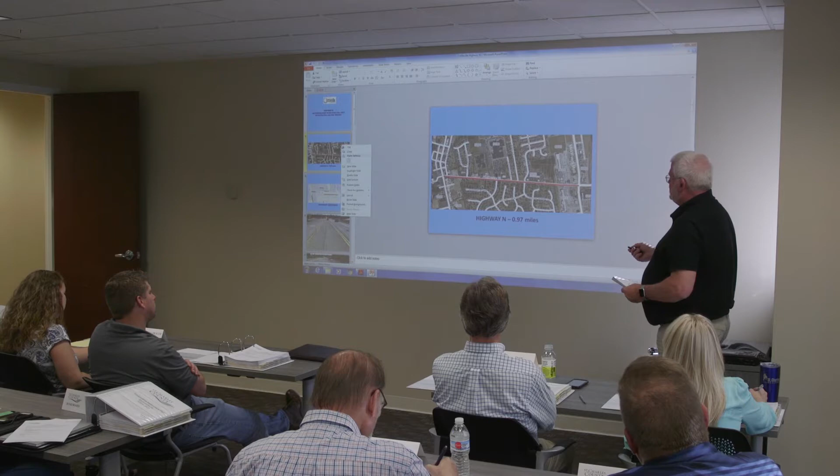Counts for the traffic on that road, 2018 is 14,000 cars roughly. 2038 is projected to be almost 21,000 cars. There's a lot of activity, obviously, with the school being here. Over here at St. Joe, this is a Catholic school, so there's a lot of foot traffic and vehicle traffic that goes up and down through this. It's a very busy stretch of roadway.

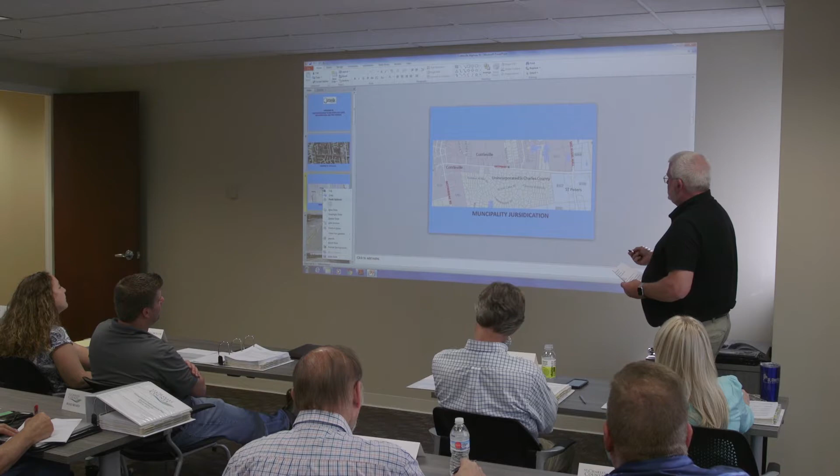You can see probably, I think there's 24 parcels altogether, and 16 of them are in the county. So about 2/3 of the project is on the county side. Small section here, this is the fire station and the cigar bar right here, so it's just a small section of Cottleville.

So most of the foot traffic is all walking up and down this side of the road to get to the school, to get to the businesses in that area.

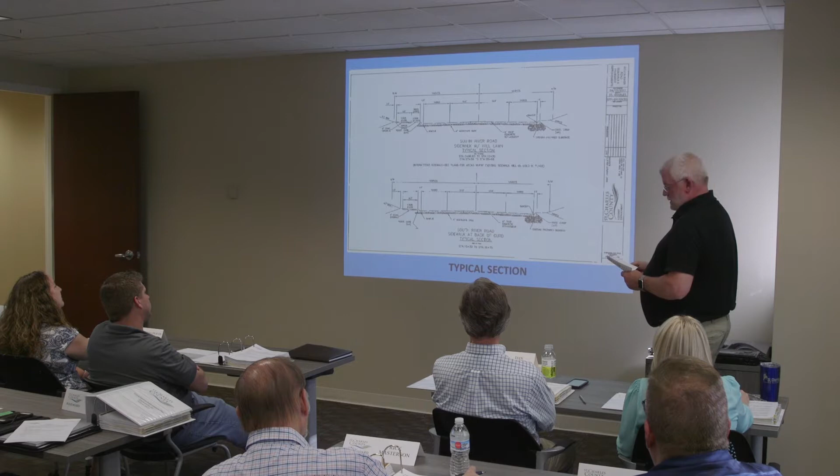Okay, funding wise, again, East-West Gateway approved this twice now. In 2013, they approved it for funding. They approved it for us in 2014 to do our side. Now they've approved it again in 2018 to do the overlay and the sidewalk on the other side. So they see the need, obviously, for this roadway to be more pedestrian safe.

Funding wise, the total project is estimated at 1.9 for this roadway and sidewalk improvements. East-West Gateway again approved 1.1 for the project. That leaves $760,000 as a balance. The proposal is, although this is 8% of the total, proposal...

The proposal is for Cottleville to end up covering 20% of it, which would be 152,000 of the 760,000, and then they're asking the road board to contribute 608,000. So it'd be a 20%, 80% match of the outstanding amount the road board did not cover.

Is that really a letter route? It is Highway N, years ago MoDOT gave it to Cottleville, so it maintained the name but it's under City of Cottleville per se. It actually runs that way all the way through Cottleville until you turn and go north past the BMOS, and then when you get to the bridge, it goes back to Highway N and State Control. So they maintain the name, but it's actually a city control route.

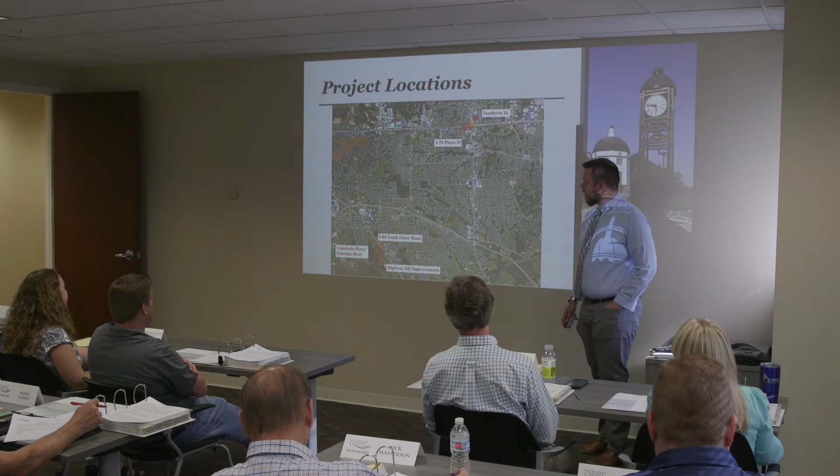Here you can see where the projects are located within the greater City of O'Fallon. Sonderen and I-70 Phase 2 are both near the I-70 and Highway K interchange, and the other 3 projects are located very close to the Highway DD, Winghaven Boulevard intersection with Interstate 64.

Before I get into the first 2 projects, a little bit about the Streets of Caledonia development we have planned. Basically it's going to be a 260-acre mixed-use development near the intersection of I-64 and Highway DD in Winghaven. It's going to be 100 acres of commercial, divided between retail and office use, so you can see examples of each. The other 160 will be devoted to mixed-use residential, looking at single-family homes, multifamily homes, and senior housing. Basically, commercial sites are going to be pad-ready and marketed for the listed purposes.

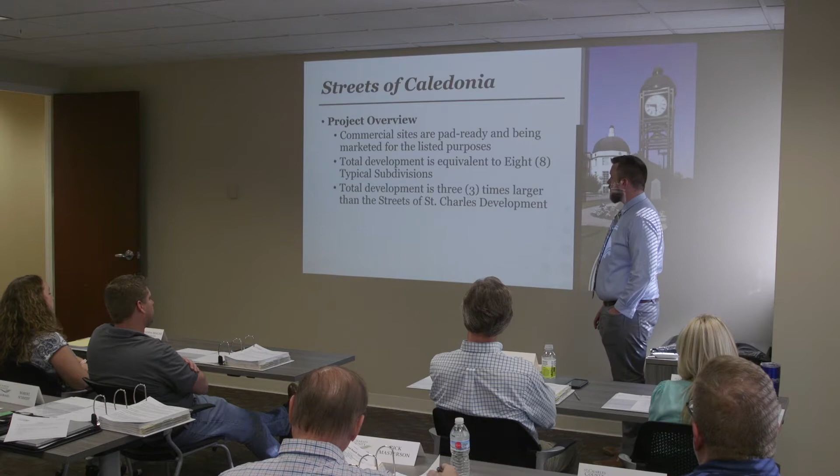The total development is equivalent to 8 typical subdivisions, and it's 3 times larger than the Streets of St. Charles development. So it's a fairly sizable development, obviously the largest we've had. So we'll get into it.

The first part is the Highway DD improvements. So you can see here, it's Highway DD basically from I-64 to just south of Caledonia Parkway. The existing conditions: DD is an arterial 2-lane highway, south of I-64. We need to do some improvements in order to facilitate moving traffic through the area for a multitude of things that are going on.

Here you can see the project scope. We want to add a traffic signal at the DD Caledonia Parkway intersection, adding a roundabout where DD and Dalriada Boulevard intersect, look at some right-in right-out side access for various parcels, provide through lanes on the eastbound approach to I-64, provide through lanes to the westbound approach on DD, and do the westbound right lane turn into a right-in right-out.

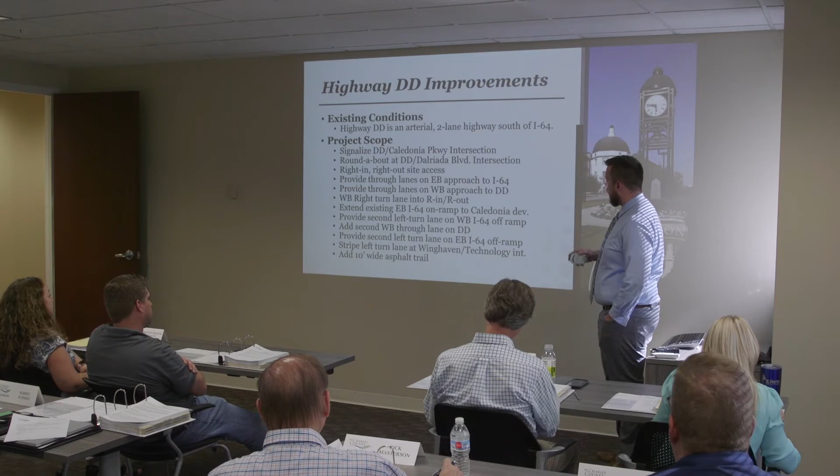Extend the eastbound I-64 on-ramp to Caledonia, provide a second left turn lane on westbound I-64, provide a second westbound through lane on DD, provide a second left-hand turn, provide a left turn into Winghaven, and provide a 10-foot asphalt trail. Basically, we're trying to improve the ability of traffic to move through the area with this large development, as there's a lot of things going on.

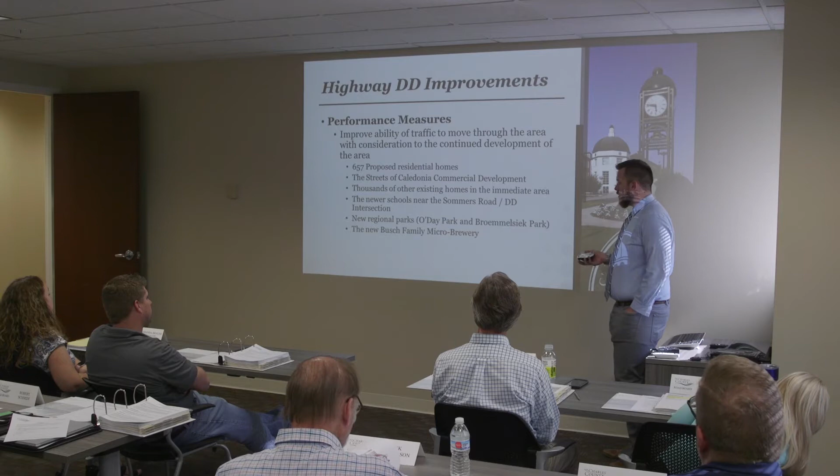We have 657 proposed homes, the new Streets of Caledonia commercial development, and a lot of other homes in the immediate area. That development is also ongoing. There are a lot of newer schools near the Sommers Road and DD intersection, 3 different schools that see a lot of traffic. There's also a lot of regional parks, O'Day and Broemmelsiek, and the new Busch Family Microbrewery going on down the road on Highway DD.

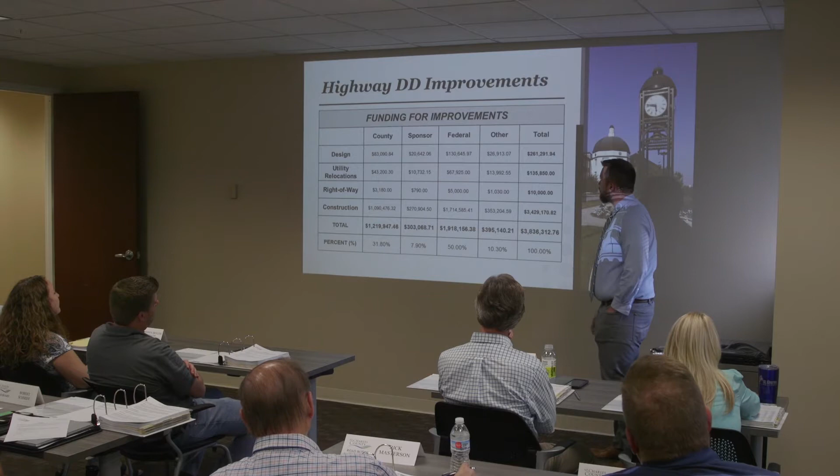Moving on to the next one. This concerns the actual 2 roads that would be built as part of the development, which are Caledonia Parkway and Dalriada Boulevard.

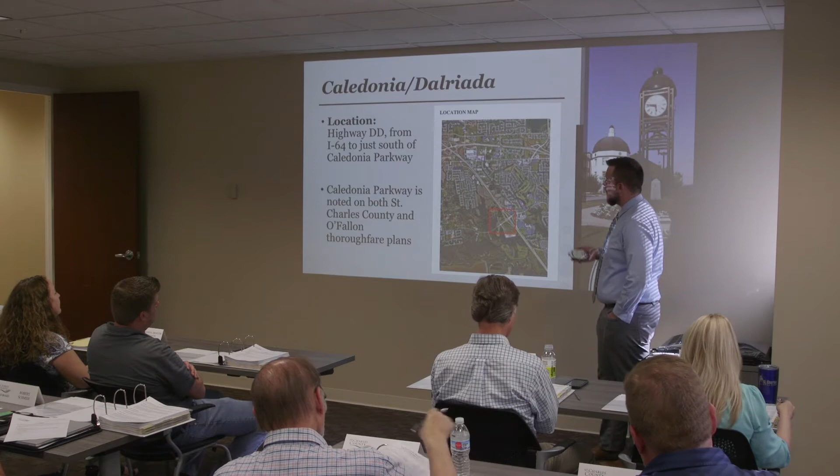Caledonia Parkway is noted on both the county and the O'Fallon thoroughfare plans. It's been planned for a while, it's my understanding. A portion of Caledonia already exists, it's already been built, but it dead ends. Dalriada does not yet exist. So the idea is to construct 2 roads: Caledonia Parkway, which would stretch between the I-64 South Outer Road and Highway DD. It's a 3-lane road with islands, and that transitions to 5 lanes once you start to approach Highway DD. This will be the main roadway through the commercial portion of the development.

The second roadway is Dalriada Boulevard, which connects between Caledonia and Highway DD. It's kind of a spur that comes off of Caledonia Parkway. It's only a 2-lane road, and that transitions to 3 lanes once you reach Long Haven Drive, another smaller roadway. It serves as a secondary roadway through the commercial development, but as the primary roadway through the residential development. The idea is, again, to help facilitate traffic movement through those streets. It also provides a continuous east-west connection between Highway N and Highway DD, which is fairly important because we don't have that many connector roads like that in O'Fallon.

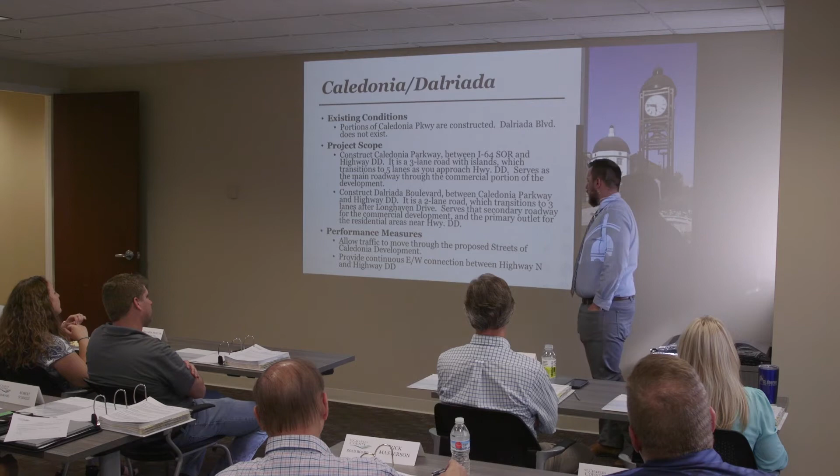So here you can see the gray highlighted area is Caledonia Parkway, and how that ties into I-64. This would be the outer road that would be developed, providing a continuous connection between that and Highway DD. Dalriada is slightly southwest of Caledonia, spurring off of that and providing connection. This would be a lot of your commercial development, and this would be much more of your residential development. So you can see how those 2 roads help facilitate movement through that. It would also extend over to Caledonia Drive to facilitate more of the residential development on that side.

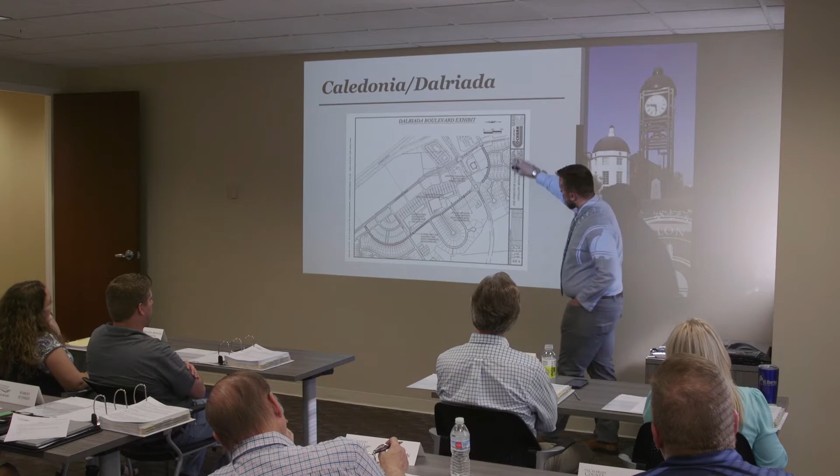Third project is the... I'm sorry, go ahead. Do we want to pause here? Yeah, I do. Okay, I was going to save questions for the end, but we'll go ahead.

Well, these two have come— Absolutely, no, go ahead. Amanda, on the first one, what do we think of that as an economic development?

Gonna drive to that area and that type of thing? So, the city's gonna kill me here.

We went back and forth on whether both of these were economic development applications. They both probably could be, but there was no quick timeline needed and no specific jobs coming. Economic development applications are usually associated with somebody coming to the region and bringing jobs, like Amazon or the North Point people, who were bringing a specific number of jobs. We knew what those wages were gonna be and exactly what was gonna be built, so we could associate that with the economic development application.

This doesn't have that, because the developer's still working on what will fill in these retail places, and I think there's room for office space too. It's a bunch of uses, but it doesn't fit our economic development model. In the future, I think we may work on a broader application, more like a mixed-use kind of thing that can support these types of developments, but we don't have it yet.

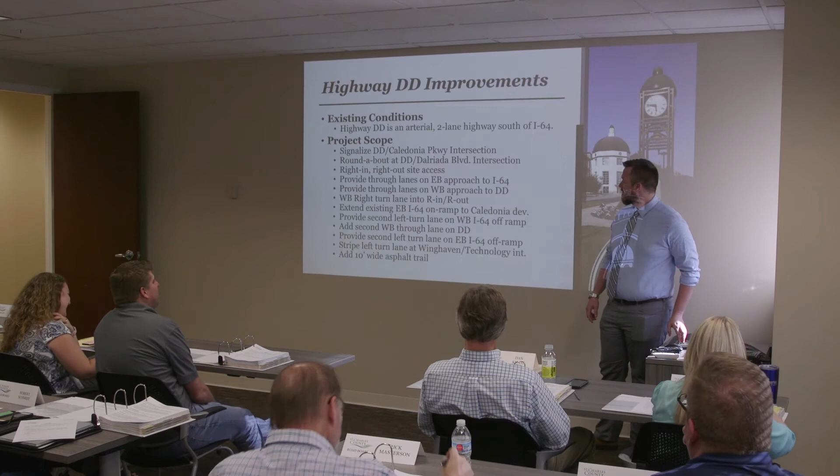So the third project is the I-64 Outer Road Environmental Studies. I have the wrong location, I apologize. Basically this is from Highway N all the way down to Highway DD, the entire I-64 South Outer Road corridor.

Right now the South Outer Road doesn't connect with Highway DD. It gets close and then just dead ends. The North Outer Road does connect between Highway N and Winghaven Boulevard.

So the idea here is to conduct both a National Environmental Policy Act, or NEPA, environmental assessment, and produce an access justification report, an AJR, for the proposed I-64 South Outer Road, or I-64 Outer Road Improvement Configuration. This project will be a joint project between the County Road Board, the City of O'Fallon, and the City of Dardenne Prairie, all of whom have jurisdiction at various points along that I-64 corridor.

The idea on this is to improve the traffic flow on the outer roads and make the connection that isn't currently there. We had a study done a while ago, and I'm just going to go through it.

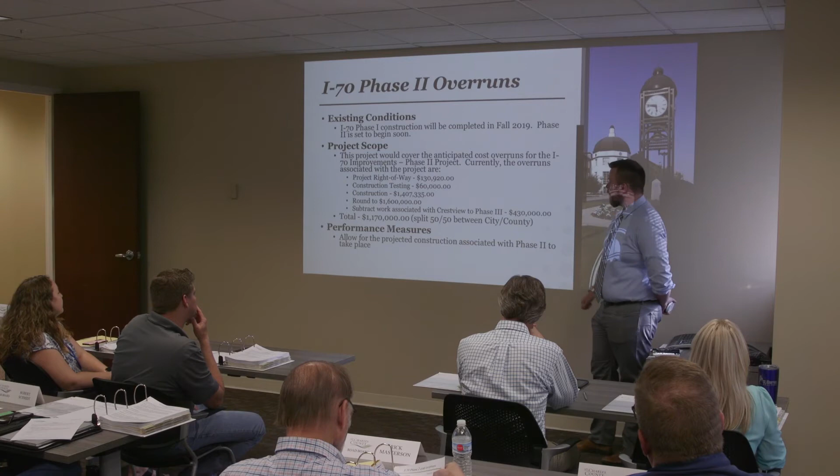The idea behind this is to cover some of the anticipated cost overruns for Phase 2. Currently the overruns are in right-of-way, construction testing, and construction itself. If you total those up, we round it to about 1.6 million. Subtracting the work associated with Crestview, a realignment to help the on-ramp at that point - that's 430,000 we're subtracting out. So we're asking for a 50-50 split between the city and county of $1,170,000, which allows the projected construction for Phase 2 to start taking place.

A bit of an explanation: in right-of-way, it's trending higher than we would have liked. We have several parcels refusing to cooperate or negotiate with the city at all, so we're going to have to get into condemnation with that. We anticipate a higher compensation amount based on what's happened in Phase 1.

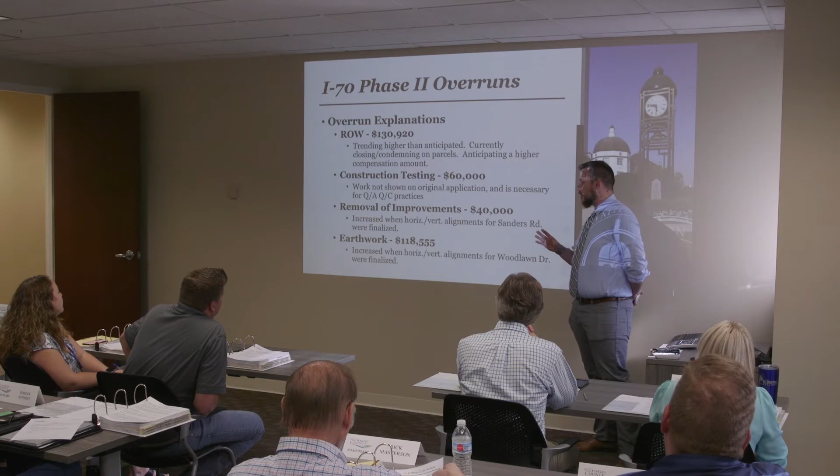Construction testing wasn't shown in the original application, and it's necessary for QA/QC - we estimate that to be $60,000. For removal of improvements on Sanders Road, when they finalized the horizontal and vertical alignments, we needed to remove more than anticipated - we estimate an additional $40,000.

Earthwork, same thing on Woodlawn - there's going to be some changes, and when they finalized the horizontal and vertical alignments, it was a little bit more than anticipated. We estimate that to be $118,000. The retaining walls near Woodlawn are also going to increase, again just because of how things change once we finalize the design.

The sanitary line has to be relocated to accommodate the final off-ramp for the one-way outer roads - that's $100,000. For ITS work, MoDOT is requiring a lot more in terms of intelligent transportation system components, so traffic signals all talk to each other. In the event of an emergency, they can be automatically reprogrammed to help move traffic through. They require a lot of that stuff now.

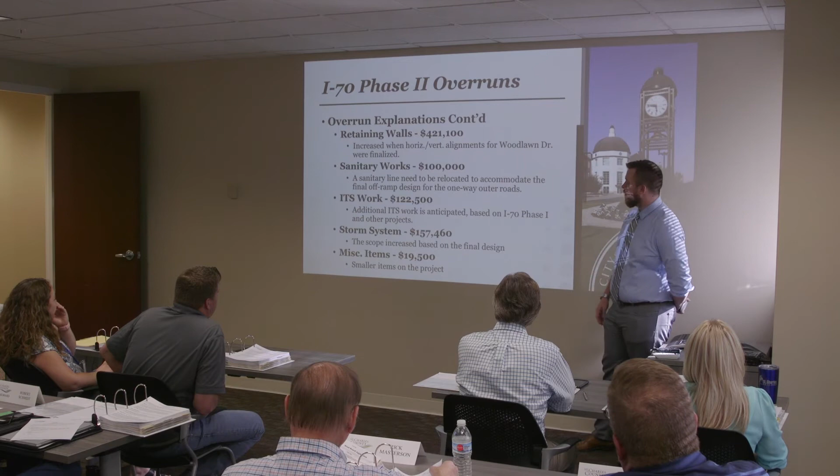Based on what happened in I-70 Phase 1, we anticipate overruns to the tune of about $122,000. The storm system also increased based on when things were finalized versus the concept the application was based on. And there are small miscellaneous items - a few things over by $1,000 here, $500 there - that all added up to about $20,000.

So here you can see a concept of everything that's going to be going on. It's mainly this work between these two streets. You can see the outer road stuff, a lot of the realignment on the north side, on-ramp and outer road - that's just a concept of what's going on.

Again, we'd be seeking a 50-50 split between the city and the county. We're partners in this project already, so it seemed good. We estimate the overruns are going to be $1,170,000, so each would be putting in $585,000.

How much was this project originally - for the total I-70 project? No, just phase 2. I apologize, I don't know off the top of my head. I can get that information to you, but I don't know what the total was.

Any other questions? The 50% required because this is a cost-sharing deal - even though it's an overrun, but it's still on the service road, basically, right? Yeah, they had just done 50-50 on the other, so we just left it the same. Any other questions? All right.

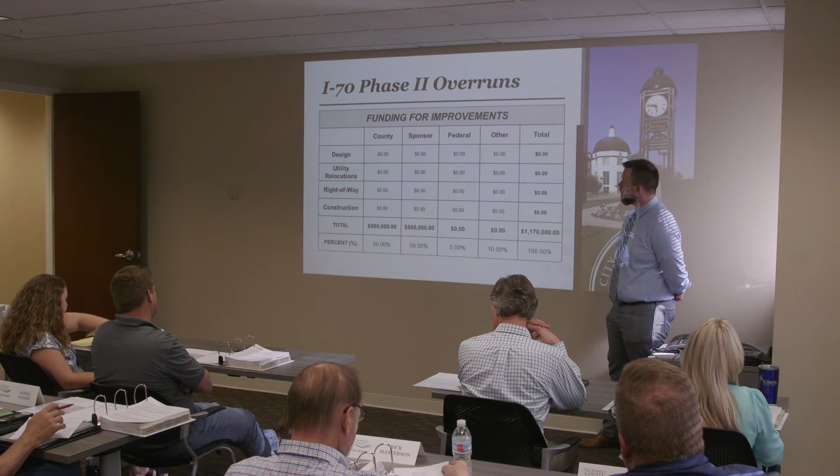Basically, it's a collector, and we expect to see, and we are seeing, an increase in average daily traffic upon completion of the I-70 South Outer Road. Since the outer road is one way, Sonderen is basically the first road that they can turn off after they exit I-70. So what we would be looking for is design, right-of-way, and construction.

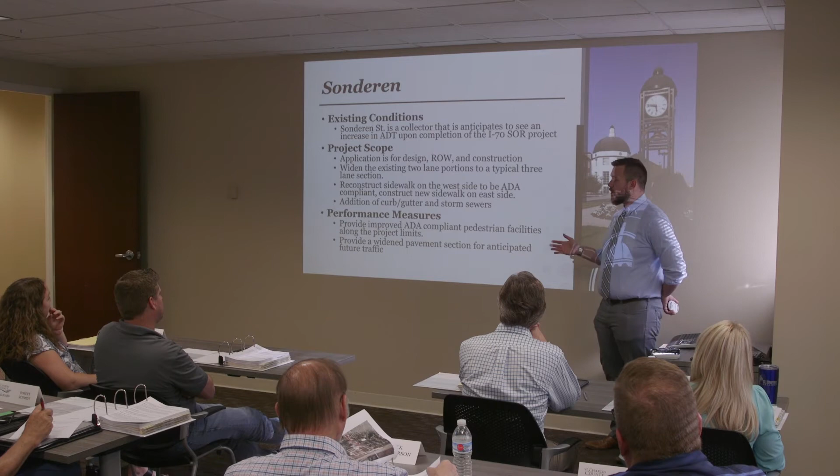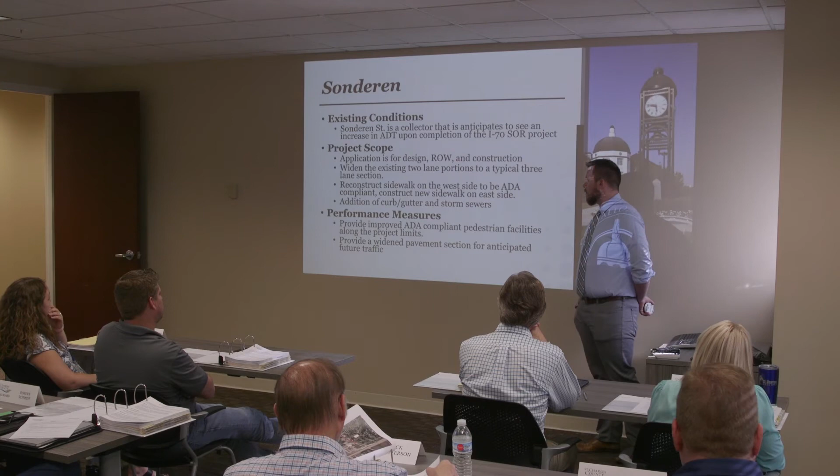What we want to do is widen. Right now, the section of road I talked about is two lanes. We want to widen that out to a full 3-lane road all the way down to East Pittman. We'd like to reconstruct the sidewalk on the west side and construct a brand new sidewalk on the east side. There's a school in the immediate vicinity, and a lot of students use that sidewalk. It's in very poor condition and doesn't connect all the way, so we'd like to give them nice new ADA compliant sidewalks on both sides, and then add curb and gutter and storm sewers.

So we estimate the total cost of the project to be $1.85 million. What we're looking for is an 80-20 split between the county and the city.

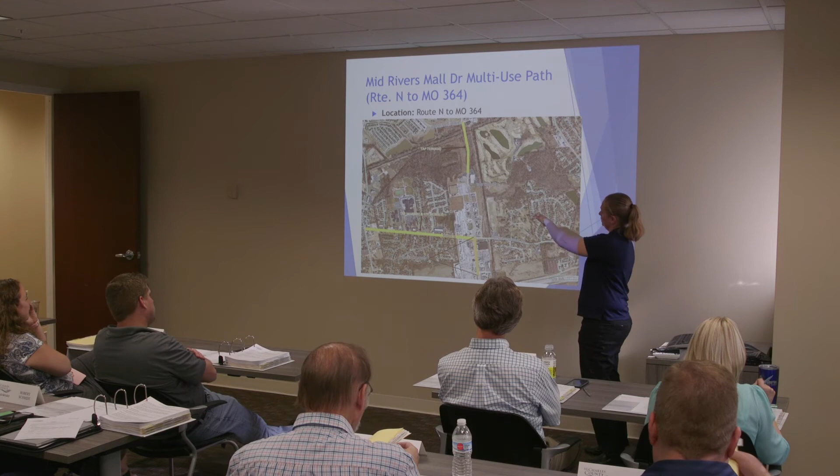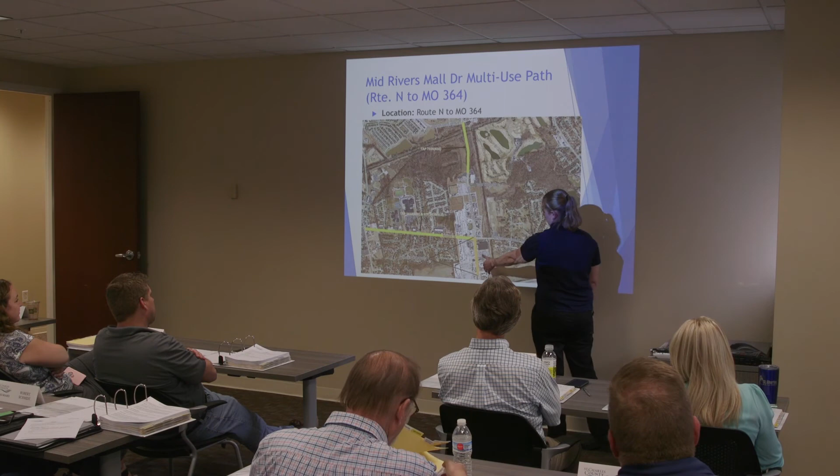Currently we've got a TAP project going on up by Cottleville Parkway to improve the trail system there. The City of Cottleville has improved the trail system along Route N, and we're proposing to add a connection from Route N down to 364, which will eventually tie into the county's park south of 364.

The existing conditions are that there is a shared through right turn lane at the intersection of Home Depot Plaza and Mid-Rivers Mall Drive.

Chick-fil-A is here. There's a lot of right turn traffic in and out of that intersection, particularly in and out of Chick-fil-A. It's very busy. Let's be honest, it's a very busy place.

So people like to use the shoulder to get around traffic waiting at the signal. The shoulder, as you can see, is a little bit of concrete, a little bit of asphalt. It's not really holding up very well to that, and it's not really intended for that purpose. So with this project, we would reconstruct that as a right turn lane.

Also, with this project is the trail improvements. From Route N down to 364, we currently have a trail on the west side of the roadway. It's not in the greatest shape. Sometimes you're in the street, sometimes you're on a trail, sometimes you're in the mud. You're kind of all over the place, so it's not really great.

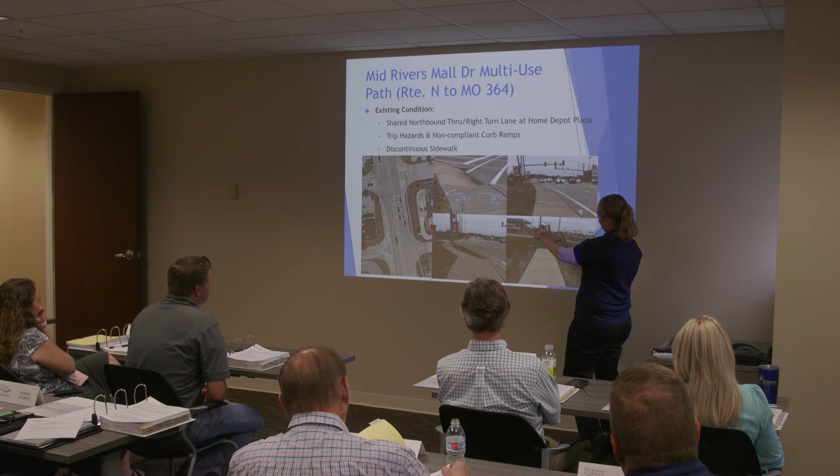So this is the east side of the roadway. We're proposing turning that into a trail. You can see we've got really poor curb ramps, trip hazards, pull boxes sticking out of the sidewalk. We've got areas where it just goes from 6 feet to a couple feet, and then it just ends. So there's really no good way to get to that trail connection piece that actually exists down there at 364.

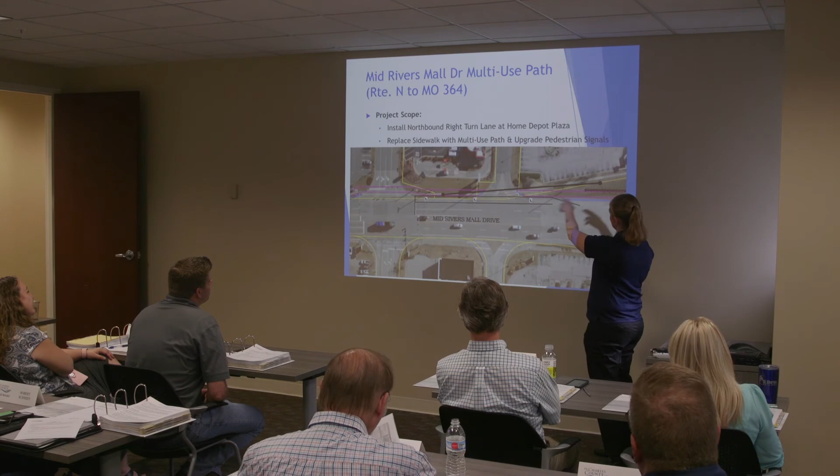So we're proposing to connect all those pieces. Like I said, install the trail along that side, and then the right turn lane that will take you into the Chick-fil-A area, Home Depot, Applebee's, all that good stuff.

Performance measures: reduce congestion at the intersection, improve safety, as well as provide an ADA compliant path and a continuous path on that west side to get you down to the existing path at 364.

Cost breakdown for this project: 20% county, 5% city, 75% federal. We applied for federal funds for this project. It's a $1.17 million project. However, we applied for it as an active transportation project.

As we discussed at our last meeting about funding trails, I'm going to reach out to Parks about this and see if we can figure out a way for us to all work together, and maybe they'll fund that portion of the trail and we can fund the road project. It makes total sense that we're doing all this together.

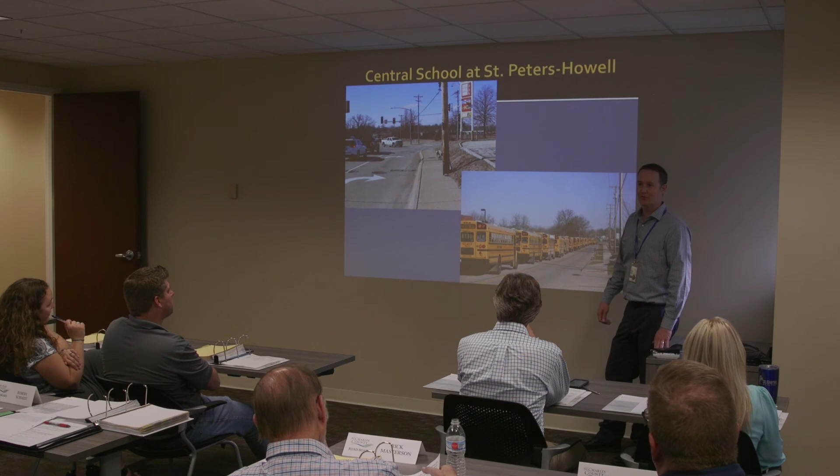Just to give you an idea of what we're dealing with here, a little overview: the gas station on the corner is now closed, but the Francis Howell Bus Barn is right up the road on St. Peters-Howell, so that certainly doesn't help things any. So like I say, just a standard 3-lane intersection right now.

The improvements we're talking about are: since we have that heavy movement west to north and vice versa, adding a lane—a second right turn lane onto Central School Road. We can shave some land off the corner here since the gas station has been abandoned for a while now. We'll have 2 lanes headed north that eventually become a turn into the school for buses; everybody else continues past Tolley Road Drive at the top. We'll also have a right turn lane developed coming down this direction, which we can bring all the way around the corner, moving the sidewalk back, taking it all the way down to the school entrance—helping facilitate some of that school traffic movement and get them out of the way.

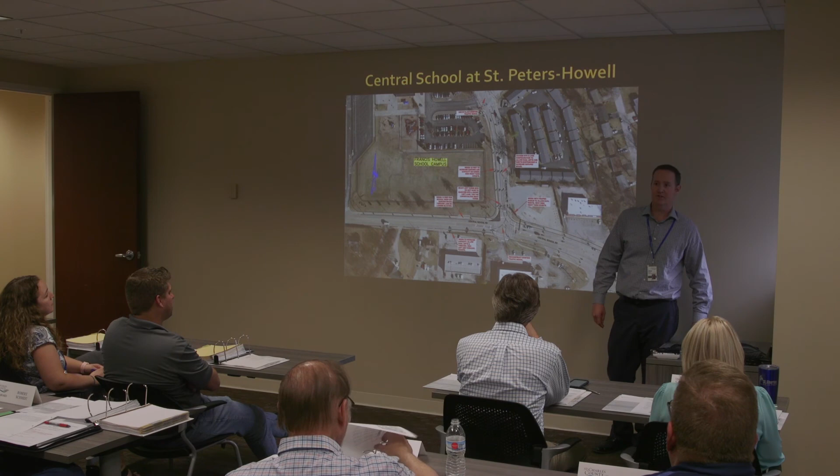And lastly, there's a lane addition on the south side of Central School Road, continuing through by the Walgreens, tying into some pavement eventually past the Walgreens, another access point on Central School Road. So basically it'll be signal modification, but primarily just a pavement widening type project and pushing back the sidewalks.

Cost-wise, we have submitted this for federal funding. We're looking at design next year, right of way to follow. The utility figure at this point is just an estimate. We anticipate the majority would be in the right of way, but it's a little too early to tell. Construction-wise, not a huge project, but it's $1.42 million. Our request through East-West Gateway was 55% federal, and as we do, we look to the road board for the remaining portion of the project.

Anybody have any questions on this one?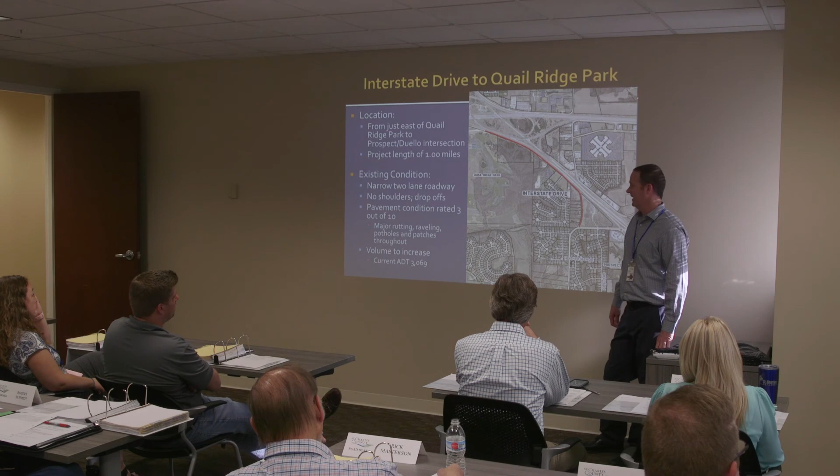Part of the issue is that some of that road is still owned by MoDOT, a great portion of it. There's no shoulders out there, we've got drop-offs. The pavement's bad, it's a 3 out of 10, and that might be generous. So we have rutting, raveling, potholes, and a reasonable ADT right now, over 3,000, and like everything else, it's always increasing out here. So here's a couple shots of what we're talking about, which is a lot of patches, a lot of rutting, and a road that's essentially falling apart.

With the park up there on the corner, what we're talking about typical section-wise is adding a sidewalk on the side adjacent to the park, away from the highway. On the other side there'd be a shoulder, used to accommodate bicyclists through there. Otherwise it'd basically just be a 2-lane road still, reconstructed, with a curb on the sidewalk side, and then if turn lanes are warranted at some of the subdivision turn-ins, that's something we would include if justified. There's a little bit of vertical alignment to improve out there as well, and otherwise it's just kind of a standard reconstruction project.

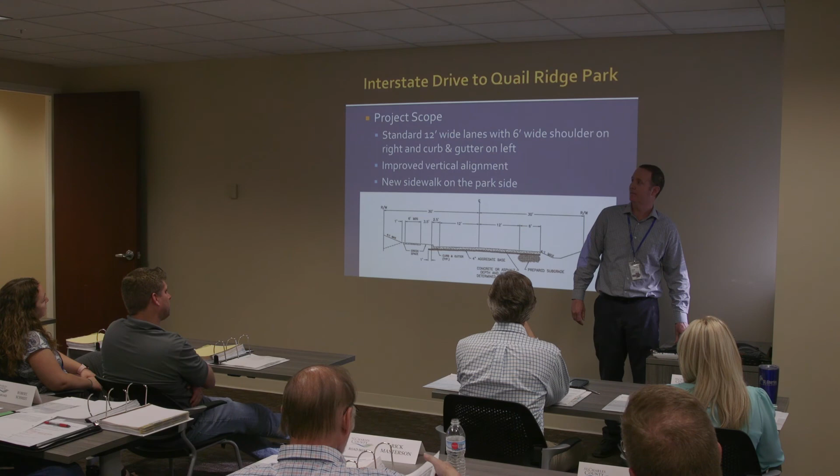Cost-wise, this has been submitted to East-West Gateway again. It was close last year, did not make the cut, so we have revised the federal portion downward. We're now asking for only $900,000 in federal funds, which will gain a few more points in their scoring process. Bottom line, it's a little over a $4 million project. The county, as we typically do, picks up design, right-of-way and utilities without asking for a federal match. We'll put the rest of the money into construction. So it's $900,000 federal, and we are pursuing a cost share with MoDOT since it is their road. They ultimately intend to get rid of it, pawn it off on us or the City of Wentzville. But at this point, we're looking for them to hopefully contribute 40% through cost share, and then 22% through East-West Gateway, which will take our portion down to a little over 1.5 million, and we can finally get this done.

All right, any questions on that one?

Last one is another segment of Interstate Drive, way out farther to the west, several miles away. We talked briefly about this one earlier in the year, last year. The project we're talking about specifically is an extension of Interstate Drive from the new David Hoekel Parkway over west to Schaper Road. What we have is the City of Wentzville's interchange here, you can see their outer roads, North Point Prairie and South Point Prairie.

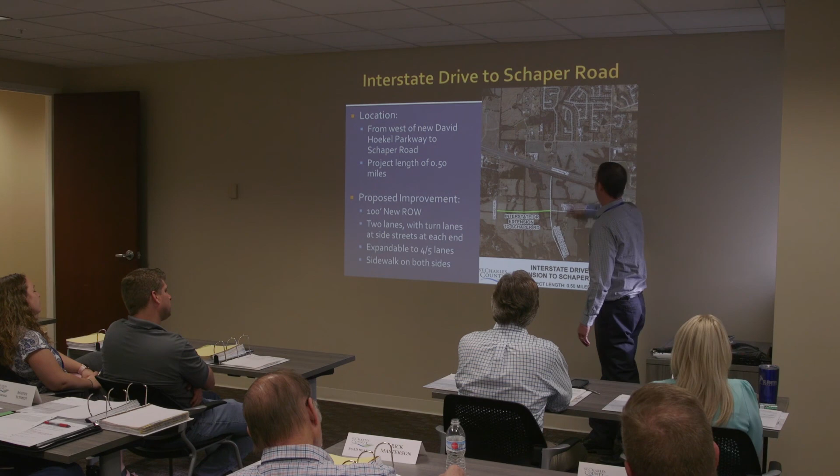As we're dealing with the right-of-way acquisition here, basically, I'll trace out some property limits. There's a large tract of land that runs way down this way, all owned by the same 3 individuals, a partnership. They came to us and said that if we will build the road from Interstate Drive, from DHP to Schaper Road, they will donate the right-of-way. It's not a bad deal.

They'll also donate the right-of-way for all of David Hoekel Parkway, and through further negotiation, they also agreed to have their consultant design the road. So ultimately, we're only talking about money to build this road connection a half mile, which is something on our thoroughfare plan and something we've always planned to do.

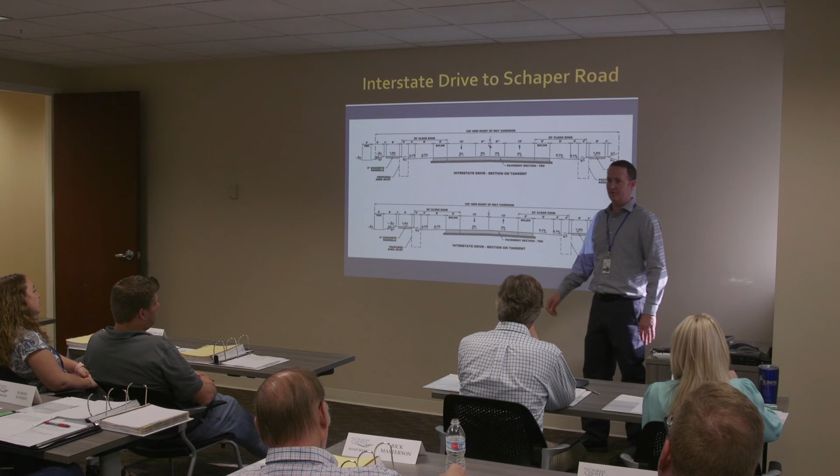Typical section-wise, it's going to look like the other parts of Interstate Drive in that general area, which in the short term is 2 lanes of pavement, a shoulder where it could be restriped to 3 lanes, but ultimately we'll have sewers in also, so a lane can be easily added, converted to curb and gutter, and we put sidewalk in on both sides. It's an expandable type road that'll go in for what it needs now, but can be expanded fairly easily in the future.

Cost-wise, where we're at is developers providing design costs. They're providing right-of-way for this project, as well as an even higher amount of money for the other David Hoekel Parkway project, which I'm not including on this. Construction estimates out at $2,150,000. So it's 80% road board, 20% developer, plus what they've already contributed on the other phase of the project.